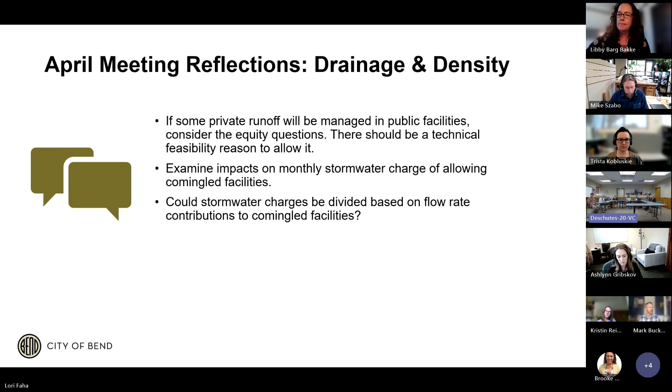And I'll also note what's been exciting: we've had a bunch of conversations about this. There's a lot of intense interest, and I really think everybody's ideas are converging about having more tools in the toolkit for development, having more opportunity and encouragement for facilities to be on a subdivision scale rather than a lot by lot scale. And actually a whole bunch of city staff from multiple departments are going out tomorrow on a field trip to look at a development on the west side of town, Discovery West, which is a bit of a poster child for these issues of drainage and density, and problems caused by small on-site facilities, erosion issues, things like that. That'll be the last bit to add to the recommendations Trish is putting together for the plan.

And then before I hand it over to Trista, one last thing. Our next meeting next month, every June, we try to have a field trip, so we try to have everybody available in person. Well, it's the only option for a field trip. So we're going to go to Overturf Park, over on the west side of town. This is an old water site. It's a really important water site because of its elevation. It's at the same elevation as our Outback facility where we have our water filtration facility and some of our key wells.

But this site, I think, is going to make for a really interesting conversation because we've just had the fire department have a discussion about this. It's essentially a big park site, but it's a water site. Bend Parks and Rec does use part of it for a dog park. The neighbors all use it. We're managing a lot out there. There's a lot of more naturalized landscape.

We had the fire department go out and talk to us about Firewise, and it made clear to us that there's still a gulf between Firewise discussions and water use discussions, as well as doing the right things for erosion control. Because if you hack down all the vegetation, you're going to have a bunch of erosion on a steep slope. So this is going to be a great site for us to walk around.

We'll look and see how the vegetation's managed now, and we can all kick the tires and talk about how we could coordinate these topics better. And also tree protection, definitely a big topic as well. So I'll be sending out an email to everybody asking for RSVPs. And at the end of it, we'll have lunches for everybody as well. So hoping everybody can come to that.

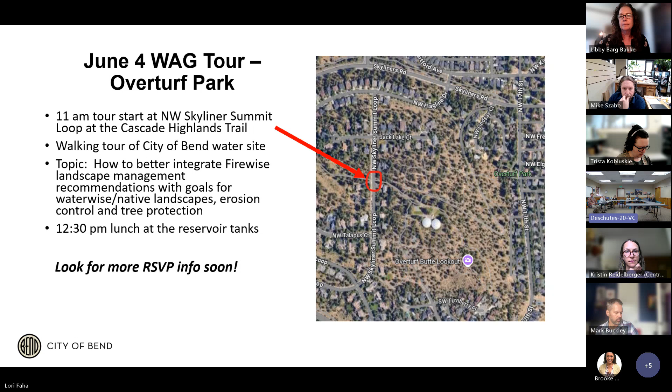I guess I'll plug in our interactive session. So we're gonna do a little Menti poll. So once we get towards the end here, it's pretty easy. Just hop on your phone or your computer, and then we'll get a little bit of feedback. So just prepping for that if anybody wants to give us some feedback. I'll share the screen and it'll show you how to dial in. It's super simple, all it really requires is your phone.

Cool. All right. Am I still audible? Yep, you're good. Okay, great. I'm just tethered. Okay.

Well, thanks everyone for joining us. This is probably our last meeting where we're going to talk about the Stormwater Master Plan. We'll take a look at what the recommendations coming out of the plan are, where we are now, and what the next steps are, including up through adoption this fall. We'll just take a recap over what we've looked at over the past year and a half or so, and then talk about those next steps. So next slide, please.

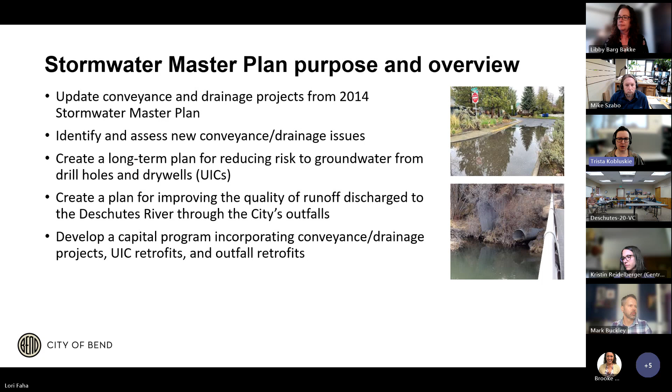We, thanks to the city's municipal stormwater permit, wanted to make sure we were addressing the outfalls that discharge stormwater to the Deschutes River, from a water quality perspective. We don't want to exacerbate any water quality concerns in the river through the outfalls. And then we wanted to develop a capital program that would incorporate all of the things that we talked about there. And not really on this slide, but another thing we are looking at is some policy decisions or recommendations around climate change, drainage and density, and level of service. That was the purpose and overview of what we were doing.

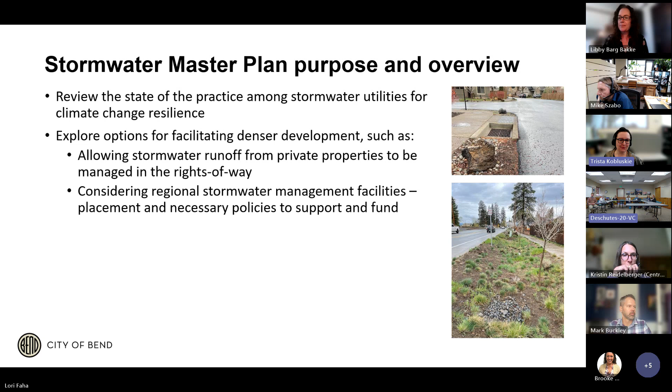And if you could go to the next slide. Oh, I forgot that these bullets were on this page. These are the policies I was just talking about. So yes, climate change, etc.

Okay, and what we asked WAG to do over the course of this time was help us with our visioning questions. What is most important to you in the community? So that helped us balance drainage concerns versus water quality concerns, for example. Also, what is the story of stormwater in Bend? What's your experience? What do you think the best way to communicate with the public about stormwater in Bend is? Leading from that into solution priorities, we actually took some of the answers we got on visioning to help us prioritize the stormwater capital improvement program so that we would be addressing the highest priority for the community, staff, WAG.

And then we have asked for input on some of these policy considerations that we've been talking about. Do you support the idea of integrating or gathering more data so that a changing climate, changing precipitation patterns could be addressed in Bend stormwater standards? What's your level of comfort with that? What's your level of comfort with adding new tools to the stormwater toolbox so that development sites have easier pathways that are still sustainable to meeting their stormwater requirements? Are there impediments to the solutions that we have come up with? And it's not mentioned on here, but again, level of service that we'll talk about today.

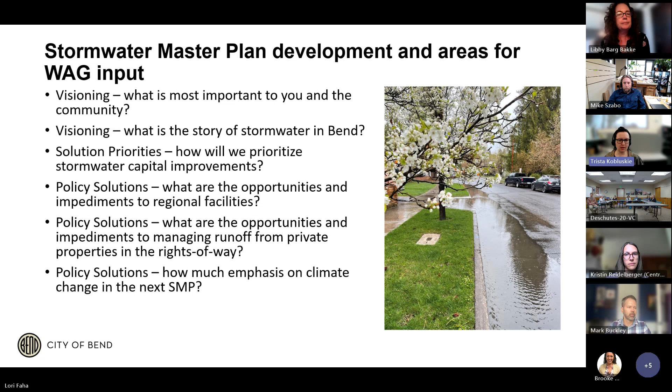So the next thing we'll look at is kind of reviewing our timeline. Next slide, please. And this has updated a little bit. We had planned to be done this summer in June originally, so that would have been an 18-month time frame from when we started in January 2024. We're not too far off that schedule. We're looking to complete this now in September with a city council adoption at that time. So we are finishing up our recommendations, and you will have a chance to review the draft when it's produced. That should be in maybe late June, early July. And then we will finalize it based on any last feedback that we get and go to council in the fall.

So it has been a pretty effective stepwise process. We've been able to step through it in pretty quick fashion, I would say. And so it's nice. Sometimes planning projects can take quite a long time, and by the time you get to the end, you're wondering if the issues you identified way back in the beginning are still relevant. But we've managed to keep a pretty good clip. And we're pretty sure that all of the stuff we started talking about in January is relevant and well on its way to becoming recommendations in the plan that will be an effective help and guidance for the city going forward over the next 10 or 20 years in managing stormwater. So we're happy about that.

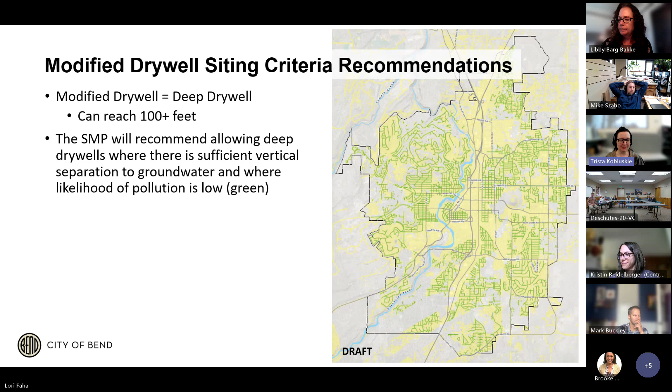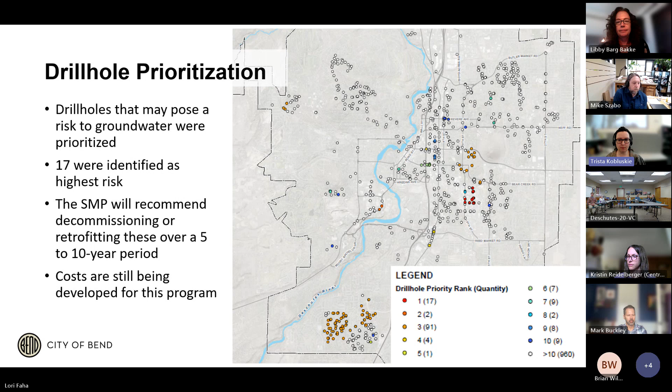So there will be a capital recommendation in the Stormwater Master Plan to retrofit or decommission and remove these 17 drill holes so that they are no longer posing a risk to the groundwater resources. We are still working on the costs for this program. But we will be recommending that these get retrofit at a pretty good clip over the next 5 to 10 years because of the emphasis on water quality that we heard from WAG and staff's concerns around this as well. So those will be one of the capital programs.

And then another capital program, these are failing UICs. So the others were working fine. The ones you just saw, they were working fine, but they may pose a risk to groundwater because they might be too close to groundwater. These are actually UICs, and some of them are dry wells and some of them are drill holes, but they are failing. They've either silted in or they simply weren't sized appropriately for the drainage area that goes to them, or the characteristics of the drainage area may have changed and they may be receiving more water than they were originally intended to.

So these locations have localized flooding that is nuisance and or may pose a safety risk on roads for the traveling public if they're on roads. So these, I think 18 of these are the highest priority ones. Mostly these were identified by staff. They get called out to these again and again and need to take measures, either closing off a lane or doing what they can to reduce the drainage issue in the moment.

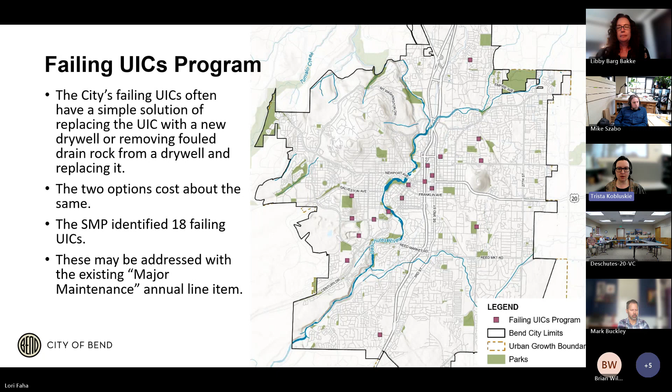But these will be either re-drilled or replaced with another 1 or 2 dry wells in series nearby so that there is infrastructure to handle the drainage that is present. So many of these solutions could be done in-house. So we've grouped them together in a capital program. And it's possible that they will be addressed under the city's already existing major maintenance, or another name for it that they used is a repair and replacement annual budget line item. But these will be a capital recommendation in the plan as well.

And next slide. So the next set of capital improvements tend to be larger projects that can't be addressed in-house, generally speaking. That might be able to be designed in-house, but they cannot be constructed in-house. So these are, in most master plans, the highlight of the master plan is the capital project list. So this is kind of the heart of what we're doing here.

So just to recap how we came up with these projects, we, again, collected a lot of information about where the drainage issues are. We studied all the outfalls to prioritize which ones are most in need of a retrofit to improve water quality at that outfall into the Deschutes River. And we came up with roughly 100 known issues in the city for drainage and water quality. And then we applied some of those goals and values that we learned about during the visioning process to help us screen, group, and select the highest priority issues that could only be addressed via a capital project like the ones we're about to look at.

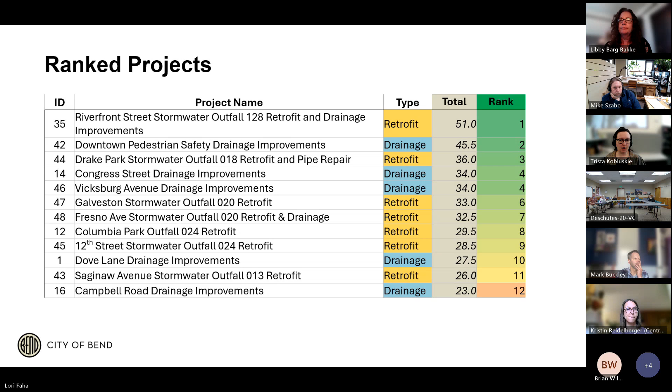For each of those capital projects you saw in the prior list, we create a fact sheet that has all the information that the city or a future engineer who might be designing this project needs to understand what problem we're trying to solve, a description of what the solution concept is. A concept level cost estimate is also included, and some thoughts about the site constraints, what additional data would be needed to be collected in order to really finalize the design and implement a project.

These are concept level solutions. We're working with very limited data, and in most cases, we really need to get survey, maybe some geotechnical information, and other types of data collection before the next person down the line who picks this up can really proceed to either vet this concept or come up with a different concept. And they're just packaged in these nice fact sheets that hopefully give the next person a good launch place for how to solve this problem.

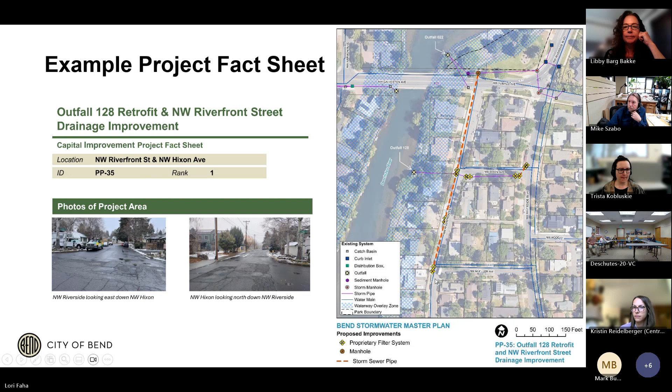Can you go to the legend of the map, please, and hover over the proprietary filter system, the manhole, and the storm sewer pipe? Got it. Oh, now my mouse is not. Wait a minute. There we go. So these symbols here, particularly the proprietary filter system and storm sewer pipe, I just want to give you a little demonstration of how we use those symbols. So if you go on to the next slide, Lori. Oh, okay. Sorry, I'm bossing you around here.

And we create a hypothetical facility using this tool and thinking about all the components that you need to actually install or construct the tool. That might be, in this case, drilling, backfilling, restoring the asphalt pavement above the location where you do this tool, etc. So we take a hypothetical facility, we come up with a cost for that hypothetical facility, and then we take a unit that we could put on a concept level fact sheet or drawing like you saw above and divide the cost by those units.

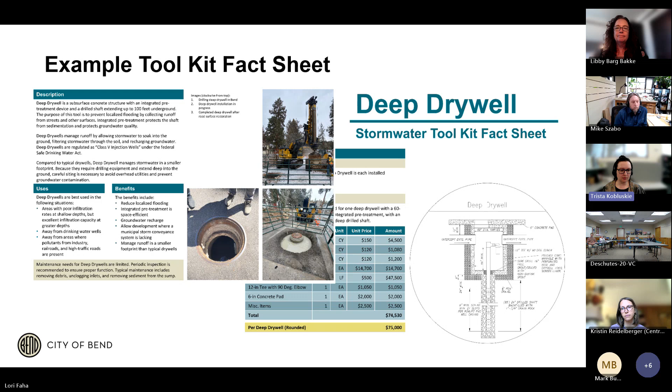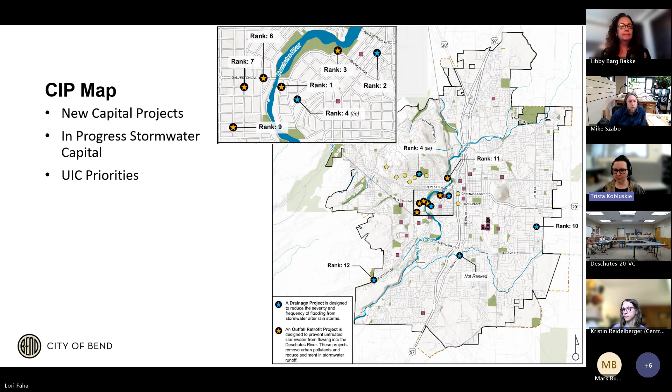Okay, so the big reveal, what is all this going to cost? A few dollars, around $22 million. This is our first draft. The city is still looking at the draft fact sheets, and we will have comments, I'm sure. So this number is not firm right now, but this is just our first cut. And you can see a few of the projects are really inexpensive. Some of the very simple drainage improvements on Vicksburg Avenue, Dove Lane, Campbell Road. These I don't think will be big lifts.

And that's nice because a few of the retrofit projects, especially ones where the water quality facilities are treating a large drainage basin, the cost to add that treatment in an existing area can be quite high. So you can see right now the Galveston stormwater outfall retrofit is our most expensive project. This covers about 16 square blocks. I want to say it's a pretty big area, and will require quite a few proprietary treatment vaults. And one of our other new tools that we haven't talked about yet, stormwater trees, are being proposed for the Galveston stormwater outfall retrofit.

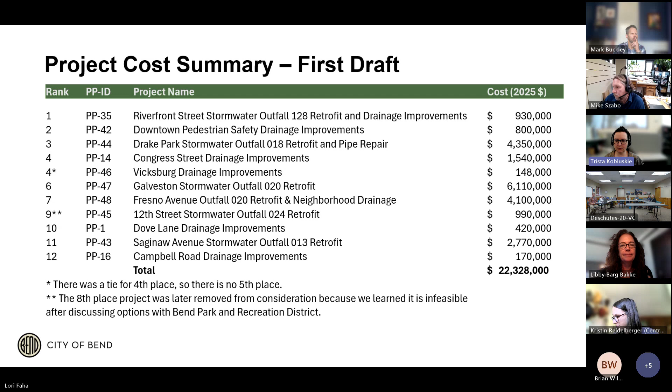But if you don't mind, I'm kind of wanting to jump us to that. Yep. Sounds good.

Okay, so you'll just see these as we go passing through them. You'll remember that we had the three policy areas: climate change, drainage, and density. And I want to make sure we have time to talk about level of service. So you'll recall we had a couple of discussions about climate change, and I think folks will hopefully remember the recommendations about that. And there will be a chance to look at it again in the draft plan when it comes out.

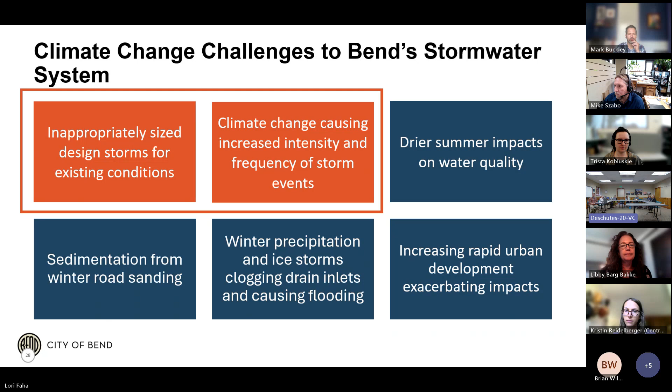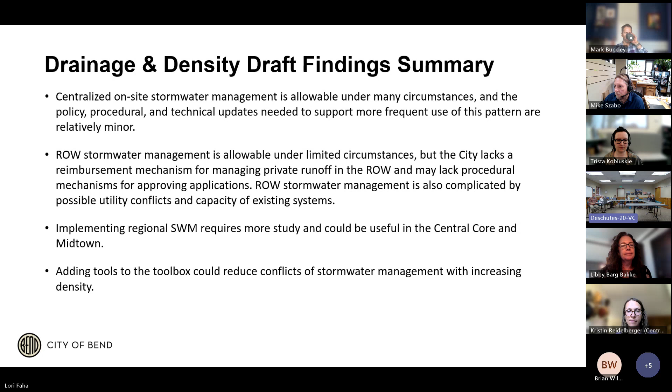So I'm going to skip through this. Drainage and density we've talked about multiple times. I think we're all familiar with that. So there'll be standards, we have to worry about trade-offs. So let's talk about level of service. Do you want to introduce it, Lori, since you're talking?

Oh, I can. So level of service is just the idea, and maybe we should have talked about this at the very beginning, but we weren't prepared yet. But level of service, when you think about it, is just like, we have a stormwater drainage utility, and not only what services are we providing, but what frequency. And that can be based on regulatory requirements.

It also can be based on level of complaints, and you can have a stormwater program where you're really just focused on being reactive to, say, complaints versus being proactive and having a regular maintenance frequency of your systems. And this slide shows some of the things that you might consider as part of level of service of the program. There's more things than this, but we were just summarizing. So responding to neighborhood scale flooding problems, maybe it's plugged systems that haven't been maintained or lack of systems.

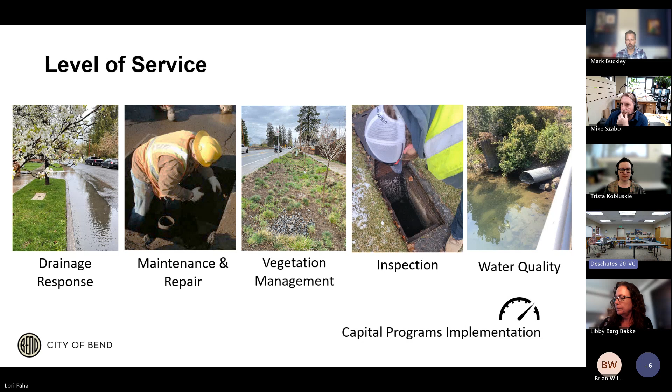So this is really important because we want to make a recommendation about level of service in the different program areas and then evaluate that when it comes time to do a rate study. I will just add that how fast you implement your capital program is also a level of service question. Yes, definitely. So I guess I kind of largely covered all that. Funding will be reviewed.

So I don't think Jillian's here, brand new back at the city, she's working on the water rates first, and I think stormwater will follow that. But I'm hopeful within the next year or so, after we have asked council to adopt the plan, that we'll be able to start digging into the costs and what the options might be in regards to our rates. And then that will be a discussion we'll bring back to this group.

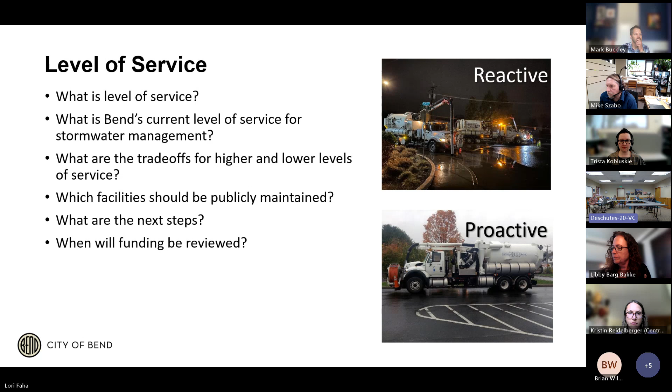So I guess I'll just keep going. Sorry. Thanks, Lori. Yeah, no problem. Stormwater stuff makes me happy to talk about.

So this was where Austin was going to set up the opportunity to ask everybody some questions. And these are kind of just getting your gut reactions. You've heard a lot about stormwater and our stormwater systems and all the different issues and the regulatory requirements and all of that over the past year and a half. He stole the screen from me.

Go for it. Yeah, so the way you can join in here, if you just go to menti.com, it's just going to ask you to put in that code 1318 7277. And so like Lori mentioned, that's kind of this final leg of the master plan, trying to develop what's a level 1, 2, 3 of service, and then incorporating that into, okay, what does that mean in terms of a rate? So what we'd love as a final input from the WAG group is how do you feel that we fall right now in terms of level of service?

So we'll just give everybody a chance. Please let me know if you're able to get in. Looks like we got one. And so this one is just kind of an all around general level of service. And then like we showed earlier, we're going to get into a little bit more granular content. Is anybody having any issues, or are folks able to get on? There's 4. And we're doing this just for the committee members or the group members, not staff. We'll have our own chance to talk.

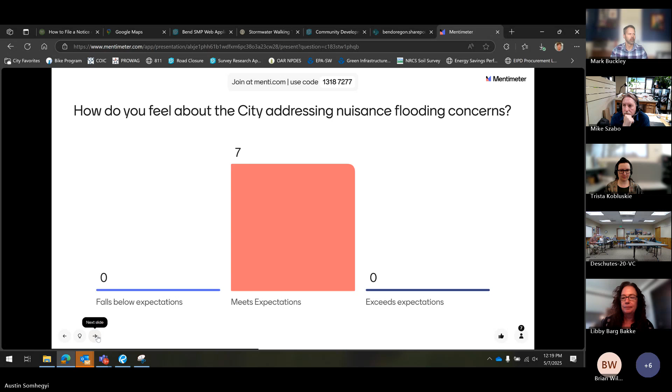This is a cool idea, Austin, doing the voting. I like it. And you'll be able to keep these results. Yeah, awesome. Right. Okay. Just a couple more here.

What kind of responsibility does the city have for just surface runoff that isn't entering the stormwater system? I'm thinking about in terms of parks and shoreline. And I know that BPRD and others have been doing some hardening and the like, but sort of from an observational perspective, is that a city issue, do you think, still?

So it's an interesting question. From a regulatory standpoint, we are obligated in regards to what's going into pipes and going out into the river. And then we have all these management practices we have to implement to meet that. In regards to properties along the river itself, I mean, other than if they're doing development and are triggering something in our development code, not so much.

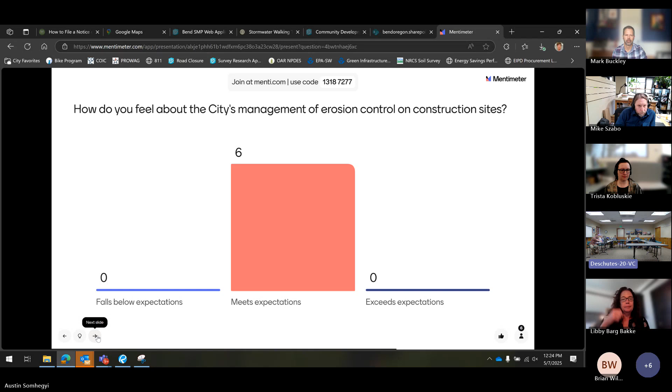Awesome. Cool. And then we have the one final for some feedback, but I think we are going to throw it back, but we're kind of running low on time. The last one was just a write-in. Oh, so how did they do that? You should be able to type in if you have any specific feedback. So this is taking your level of service exceeding, meeting or underperforming, and like we mentioned, that ties to rates.

So just curious, does anybody have any arguments they'd be willing to share, just to bring to the conversation when it gets to a rate discussion? It's a sensitive issue here in the city about rates. And so we're trying to make sure that we can manage our values when it comes to stormwater. So if you have anything to offer up as far as an argument, it could be put on here. You could also type into the chat if that's easier.